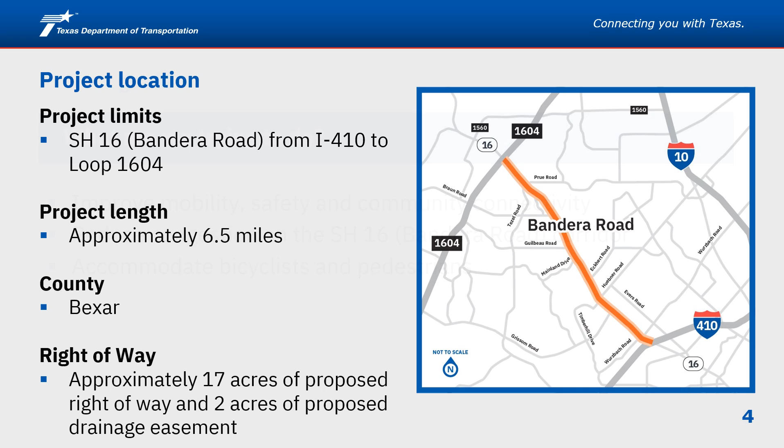Let's get started. The project limits are SH16, or Bandera Road, from I-410 to Loop 1604. The project is approximately 6.5 miles in length and is located in Bexar County, Texas. Subject to final design, the proposed project will require approximately 17 acres of right-of-way and 2 acres of drainage easement. The goals of this project are to improve mobility, safety, and community connectivity, reduce congestion on the Bandera Road corridor, and accommodate bicyclists and pedestrians.

Proposed improvements for Bandera Road include expanding the existing 4 to 6 lane divided road to an 8-lane parkway, converting 12 existing traditional signalized intersections to signalized restricted crossing U-turn, or RCUT, intersections, and adding shared use paths to both sides of the roadway for bicyclists and pedestrians.

The Bandera Road project started with a feasibility study from 2018 to 2023. Throughout this time, there was continuous community engagement, including workshops, business forums, briefings, pop-up events, public meetings, and property owner meetings. In October 2022, several roadway recommendations were presented at the virtual public meeting with in-person open house. In December 2023, the feasibility study was approved by TxDOT, and the cities of Leon Valley and San Antonio expressed support to move the project forward to the schematic and environmental phase.

Recommended features carried forward for the Bandera Road corridor include an at-grade parkway with RCUTs concept, shared use paths for bicyclists and pedestrians, access management, and opportunities for corridor placemaking by others.

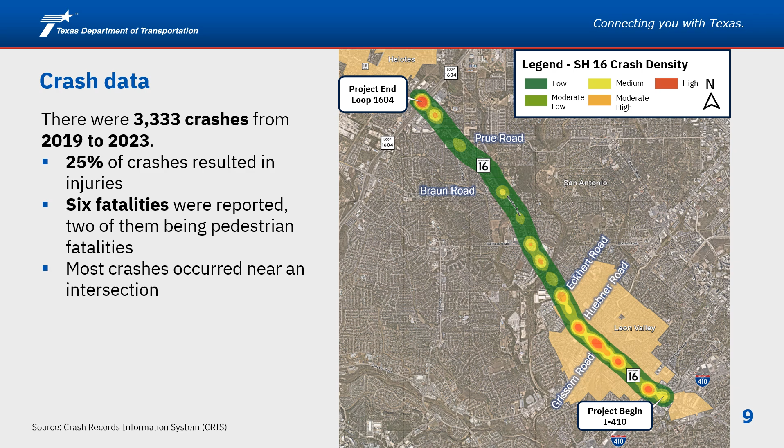The map illustrates crash data along the Bandera Road corridor. From 2019 to 2023, there were 3,333 crashes along the corridor. 25% of these crashes resulted in injuries, and 6 fatalities were reported, 2 of them being pedestrian fatalities. The analysis of crash data from 2019 to 2023 showed that most crashes occurred near or at an intersection. The bright orange-red color on the map indicates areas with a higher number of crashes, while the green color indicates areas with a lower number of crashes.

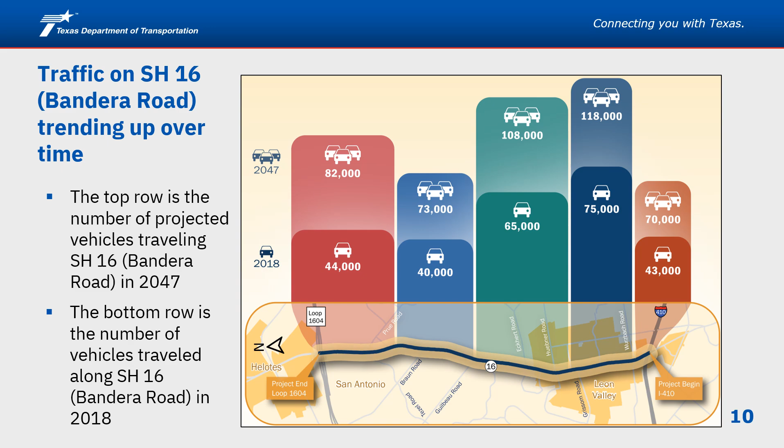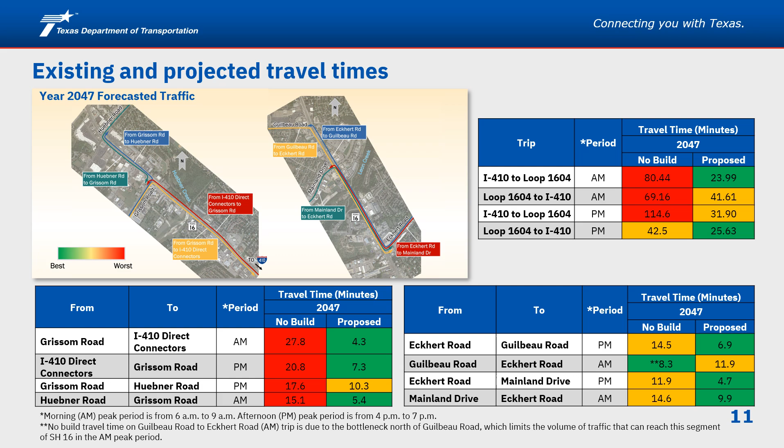The proposed improvements would reduce most of the travel times. Please note that the no-build travel time on Guilbeau Road to Eckhert Road in the AM trip is due to the bottleneck north of Guilbeau Road, which limits the volume of traffic that can reach this segment of Bandera Road in the AM peak period.

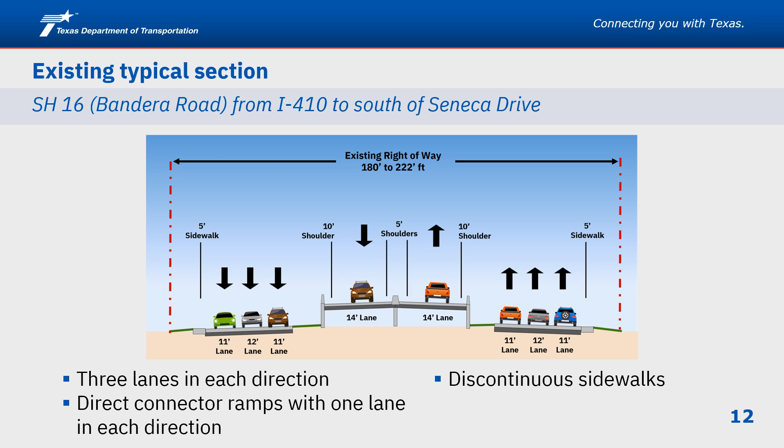To better understand the proposed improvements, we will look at the existing conditions of Bandera Road. From I-410 to south of Seneca Drive, it currently has 3 lanes in each direction, direct connector ramps with 1 lane in each direction.

As you continue north along Bandera Road, the corridor from south of Seneca Drive to Guilbeau Road currently has 3 lanes in each direction, signalized intersections, and discontinuous sidewalks within an existing right-of-way width of 170 to 270 feet.

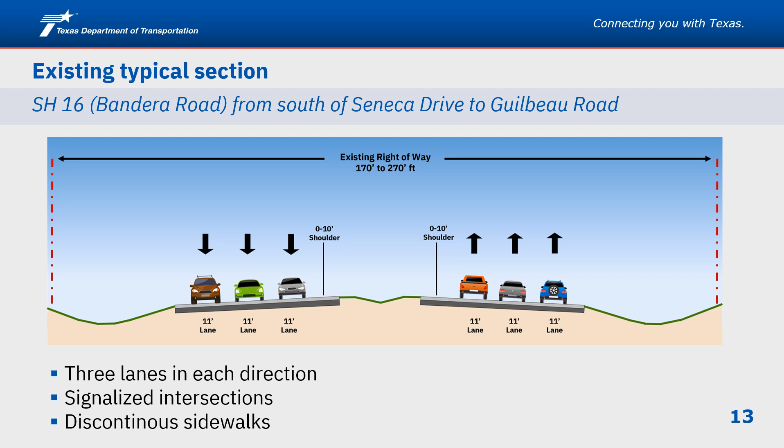Bandera Road from Guilbeau Road to Loop 1604 currently has 2 lanes in each direction, signalized intersections, and discontinuous sidewalks, with an existing right-of-way width of 170 to 220 feet.

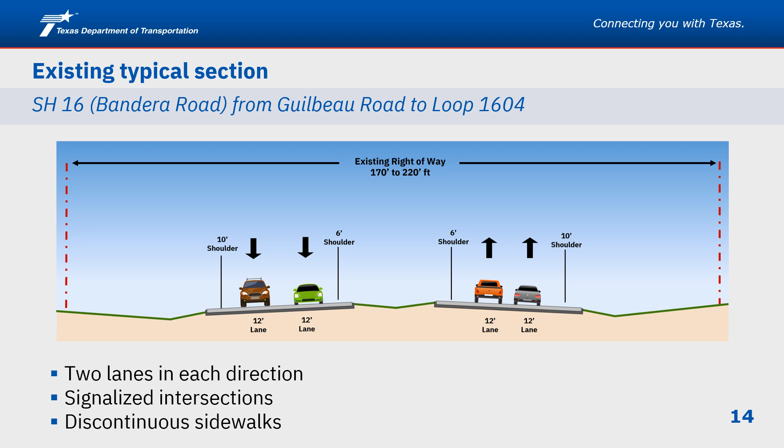Now let's talk about the proposed design. From north of I-410 to south of Seneca Drive, TxDOT's proposed design includes providing shared use paths for bicyclists and pedestrians. Please note that this is the only proposed change in this section of the roadway. The proposed right-of-way width would be 180 to 230 feet in this section.

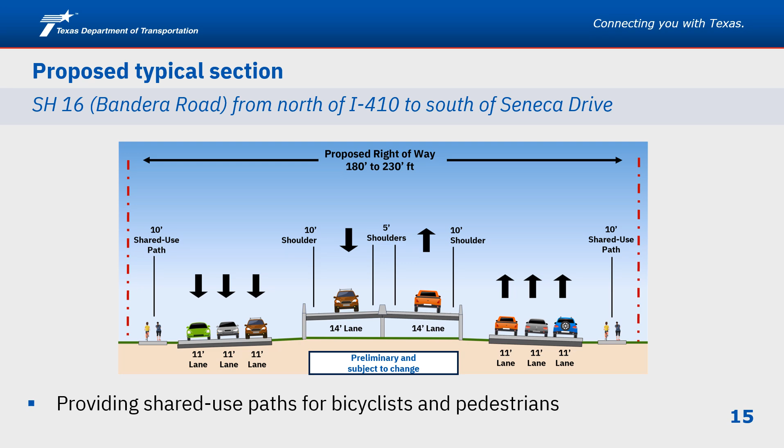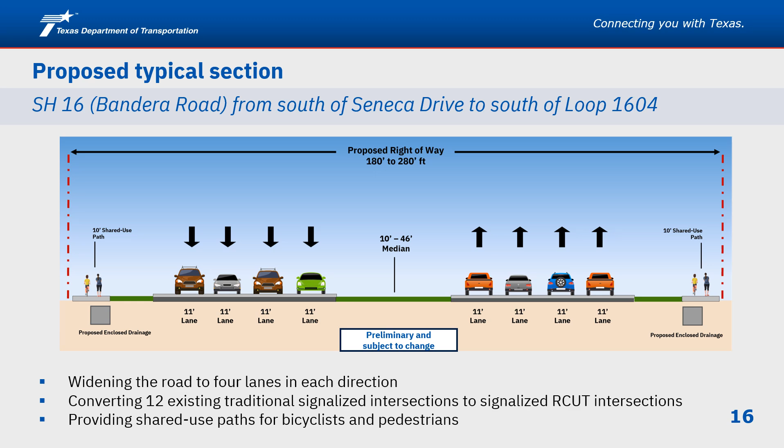From south of Seneca Drive to south of Loop 1604, TxDOT's proposed design includes widening the road to 4 lanes in each direction, converting 12 existing traditional signalized intersections to signalized RCUT intersections, and providing shared use paths for bicyclists and pedestrians. The proposed right-of-way width would be 180 to 280 feet in this section.

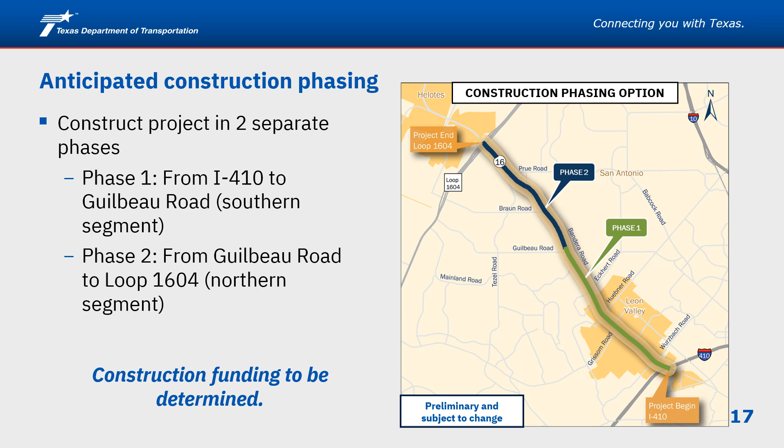TxDOT evaluated multiple breakout projects and may construct the project in 2 separate phases: Phase 1, from I-410 to Guilbeau Road, the southern segment, and Phase 2, from Guilbeau Road to Loop 1604, the northern segment.

TxDOT is proposing to build the south half of the Bandera Road corridor first. Building the south half first would provide the greatest reduction in delay and improvement in throughput, improve the segment with the highest traffic volumes and crash rates, construct shared use paths for about 60% of the corridor, and construct ADA crossings at 12 street RCUT turnaround intersections.

With any project that receives federal funds, TxDOT is required to evaluate the potential environmental impacts and follow the National Environmental Policy Act of 1969, known as NEPA. In compliance with NEPA and other federal and state environmental regulations, the environmental process included evaluations of potential impacts to the natural and human environment.

This included evaluations of water resources, traffic noise, biological resources, and social and community resources. TxDOT avoids, minimizes, and mitigates environmental impacts to the greatest extent feasible. Subject to final design considerations, the proposed project is anticipated to require approximately 17 acres of right-of-way and 2 acres of drainage easement. Non-residential structure displacements are anticipated.

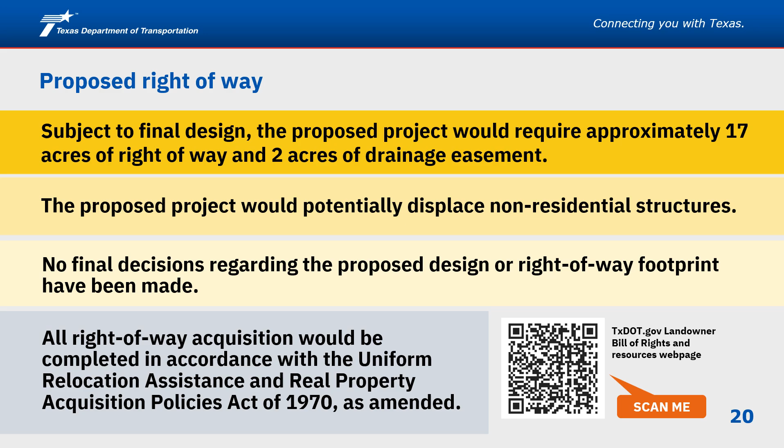All right-of-way acquisition would be completed in accordance with the Uniform Relocation Assistance and Real Property Acquisition Policies Act of 1970 as amended. For further information on TxDOT's right-of-way acquisition process, please visit TxDOT.gov, keyword search Landowner Bill of Rights, or scan the QR code shown on the screen.

The Bandera Road project started in 2018 with an existing conditions assessment. In 2020, the feasibility study was conducted and multiple alternatives were presented to the public. In December 2023, the feasibility study was approved by TxDOT, moving the project forward to design, schematic, and environmental studies. TxDOT anticipates environmental and schematic design approval in 2025. This timeline is subject to change.

A couple of things to note: there is currently no funding for improving Bandera Road. TxDOT has begun coordination with regional partners to identify funding opportunities for the preferred build implementation plan. Right-of-way acquisition and utility relocations would follow approval of the design, schematic, and environmental studies. Construction timeline has not yet been identified.

The next steps in this project will be to document, evaluate, and address public input, refine the proposed roadway design if applicable, and finalize schematic and environmental documentation for submission and approval.